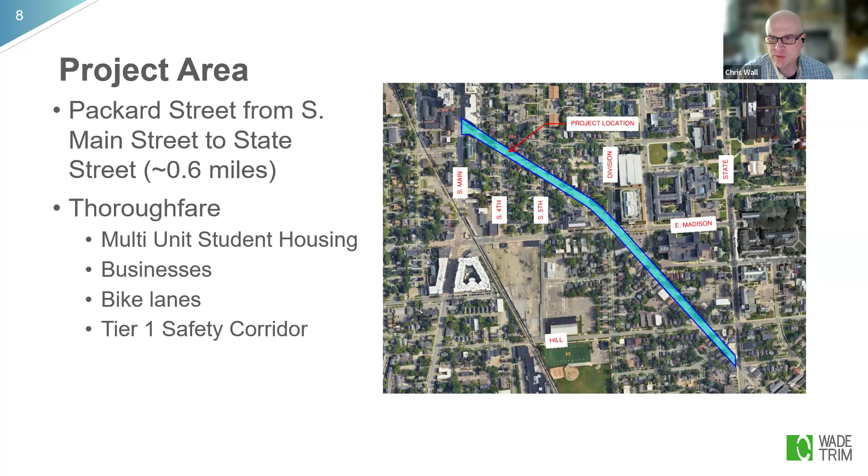The corridor is also a tier 1 safety corridor. So that means we're trying to provide an all ages and abilities bicycle corridor through there. Next slide, please. So as part of this project, we're trying to accomplish some of the city goals that are set forth. One is the Vision Zero goal. So by 2025, no one dies or is seriously injured in crashes on Ann Arbor streets.

So as part of this project, we're trying to improve those bike lanes, also add some special emphasis crosswalks, and then we're looking at a couple intersections at adding some bump outs, which will help reduce the crossing width of a road for pedestrians across. So by improving the safety for pedestrians there.

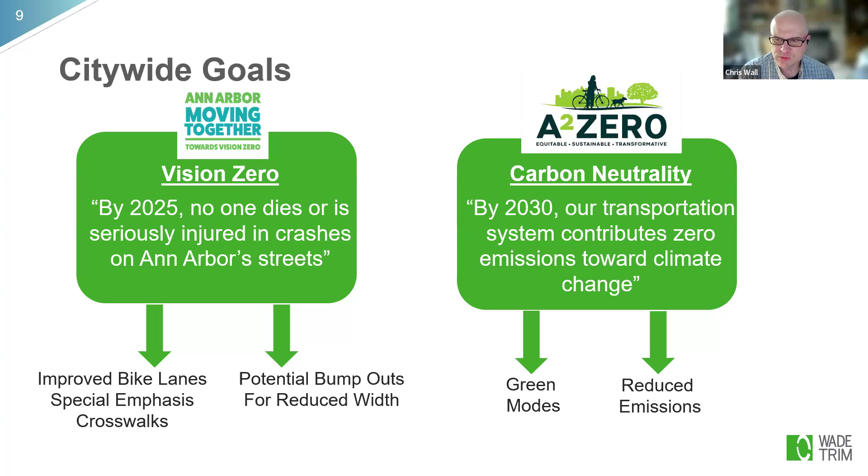Another goal is the A2ZERO initiative for carbon neutrality. So by 2030, our transportation system contributes zero emissions towards climate change. And so by promoting those bike lanes and use of the sidewalks, we're promoting green modes of travel, which also helps reduce emissions because of less vehicle use.

Next slide, please. So some of the project highlights include a new 12-inch water main through the entire length. Currently out there, there exists a 6-inch, 8-inch in some places water main that's reached its age limit, and we need to install and replace that water main with a larger diameter 12-inch water main to meet the demands of the buildings and community in that area.

Also, if you've driven that road, you know how poor that pavement is, and so we're replacing the road surface. Some of the sidewalk ramps, if they're not ADA compliant, which is Americans with Disabilities Act, we'll review those and improve some of those sidewalk ramps. We're also reviewing those bike lane improvements and going to make those permanent. We're reviewing signing and pavement markings, and we'll make some improvements to those.

We're also looking at upgrades for signals at 4th and 5th intersection, including APS, which is audible pedestrian signals. And the signal that's at South Main Street, we're also looking at installing that APS as well. And then, as I mentioned, there's some bump outs that we'll be looking at installing too. And Andy will go through some details in that in the next few slides here.

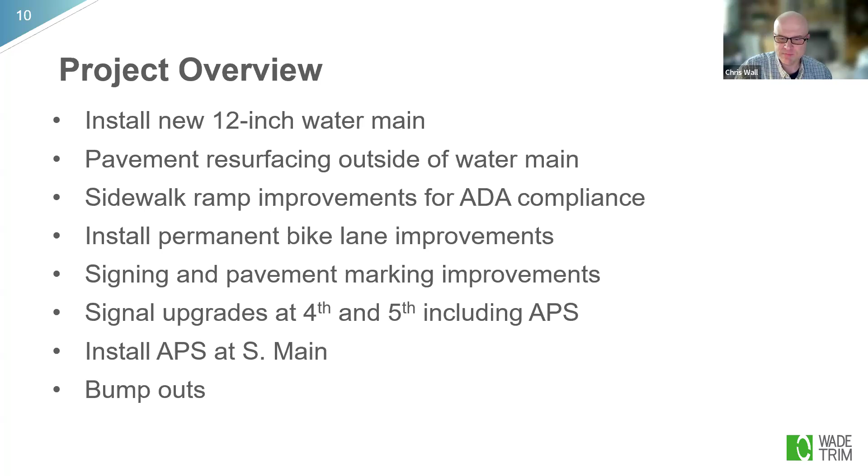You want me to, is this my slide or your slide, Andy? I can't remember. Mine? It doesn't matter. I can take it from here. Yeah, you take it. Yeah, you got it.

Thank you, Chris. Yeah, so right now our current timeline looks something like this. So we're currently in the design phase. We're working through the design. We're looking at the various elements that Chris discussed, and we're looking for opportunities to improve things. We anticipate the design phase will wrap up by the end of this year. The project will go out to bidding sometime between November and January, and the city will receive bids, and this will get to construction in spring of next year.

We anticipate the construction will last all season, so it'll probably wrap up preliminarily in November of 2026, and we will expect final completion, which is basically like final touch-ups and landscape restoration, to take place in the spring of 2027.

The big impacts that we want you all to be aware of are safety concerns, noise and dust produced by the construction operations. There's going to be some heavy equipment out there moving earth around, installing aggregate and pavements, and this is going to generate a lot of noise and a lot of dust for you all to be aware of. There will be regular traffic interruptions, and I have some slides that I'm going to talk through regarding the traffic interruptions and the detour routes that we're going to put in place, but traffic will be interrupted for vehicles, pedestrians, and bicycles, and we will detour all of those modes of traffic.

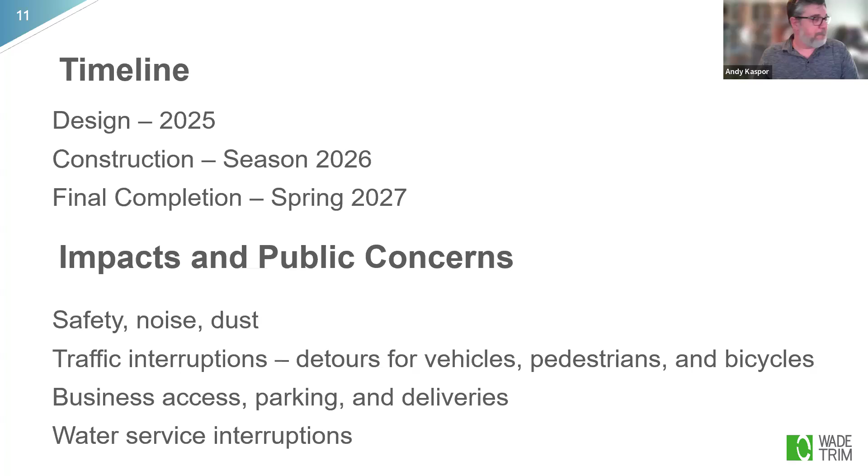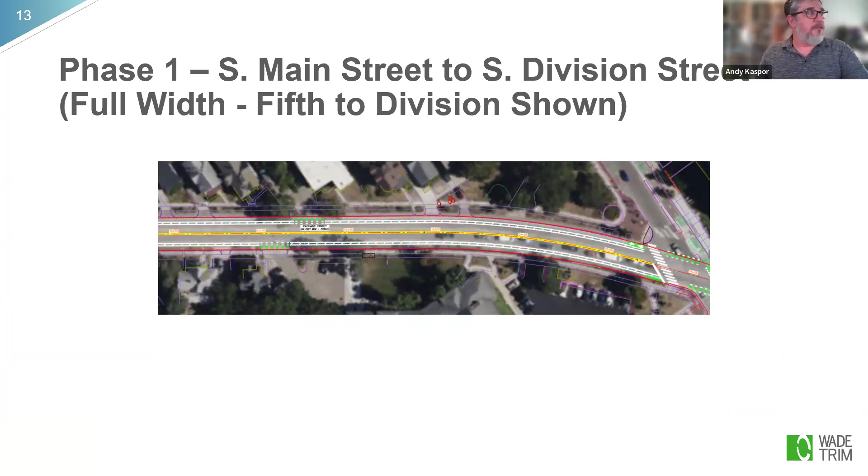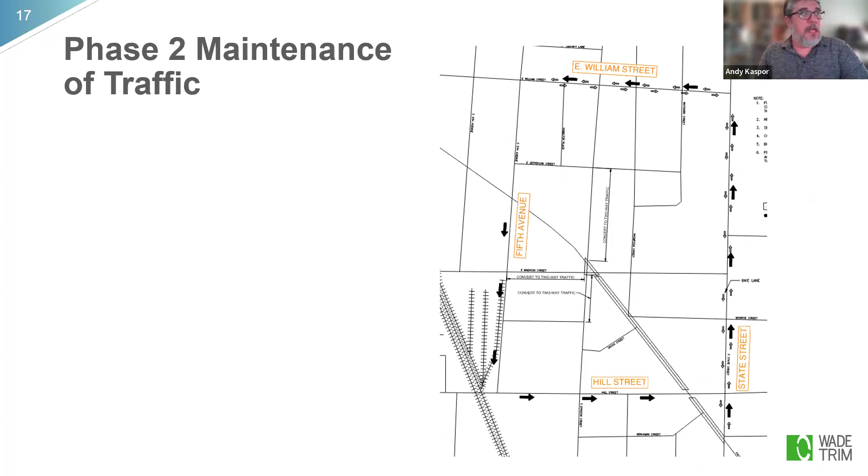For phase 2, it's similar. So we're going to be routing westbound traffic along State up to William and then south. And then for eastbound traffic, we'll be routing them south along 5th to Hill and then east to State.

Would Andy, Chris, oh yeah, what do you got? I was going to suggest maybe going back to those detail slides and just walking through those real quick, or maybe not as quick, but maybe go to the phase 1 at South. Yeah. And just talk about, are the curb lines changing, just to give a little bit more context? How does this compare to the existing laneage? It's pretty similar to what it is today, right? Yeah, that's correct. Thanks, Chris.

So essentially, we're not going to be realigning any curbs. We will be installing bump outs at 4th and 5th, but these bump outs are going to be similar to the bump outs that you see at William and South Main. These are going to be flush with the pavement, and basically the purpose is just to create a visual deterrent for vehicle traffic to stay out of the bike lanes and out of the sidewalks as pedestrians cross them.

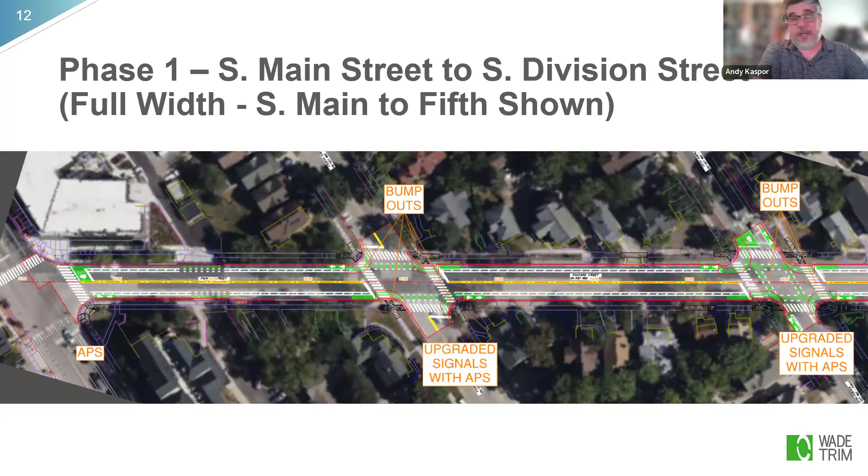And basically the intent here is, after we remove and replace the pavement, we're going to reinstall those pavement markings exactly how they are, for the most part. We are going to be making a few improvements here and there. For example, the big improvement on this slide is on the left side. It is the green bike box at the South Main intersection there. That's a no turn on red intersection. The purpose of that bike box is to allow bicyclists to pull up and get in front of the vehicle traffic for their protection. Okay, maybe move to the next.

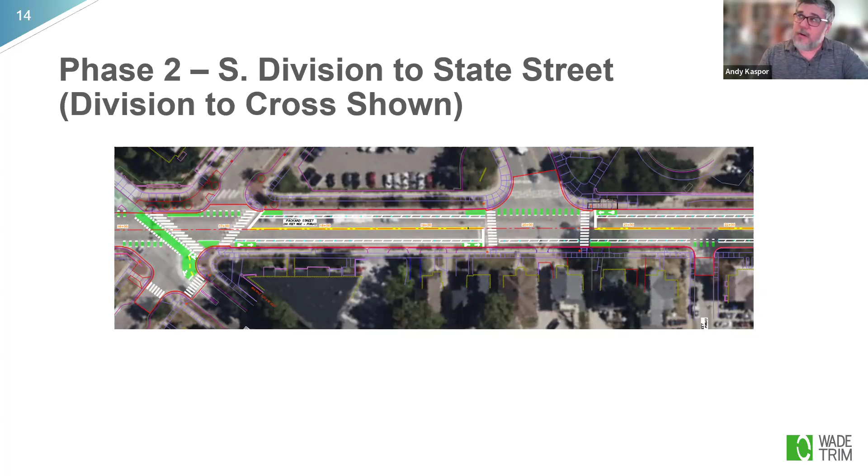Yeah. And same thing here, the curb lines stay the same. Yeah, that's right. So we're not changing any curb lines. On the next slide, there's something important to point out. Here at the Division and Madison intersection on the left-hand side, U of M does have a major development that's going to be taking place concurrent with this project. We're not exactly sure what that looks like right now. U of M is still working out the details, but we are coordinating this project with them, and we're on board to basically make whatever their improvements are there consistent with our project.

Could you restate the impact to those spaces? Yeah, so those spaces are going to be closed during this phase of the project, but we will work with businesses to accommodate their loading and unloading of deliveries.

But in terms of the spaces and loading zone, what exists today is going to remain. Yes, that's the future. Cool. Okay. Thanks. All right. Thanks for walking through that with me.

Yeah, my pleasure. One other thing I just wanted to mention, you might have already said this, Andy, but at the same time as the vehicle detour, there will be a bicycle detour. I'm sorry, go ahead. Nope, that's it. Yeah, so we're going to be detouring all modes of traffic for this project because of the various sidewalk ramp improvements. The ramps at the intersections will be inaccessible. So we will be detouring foot traffic, bicycle traffic, and vehicle traffic throughout this project.